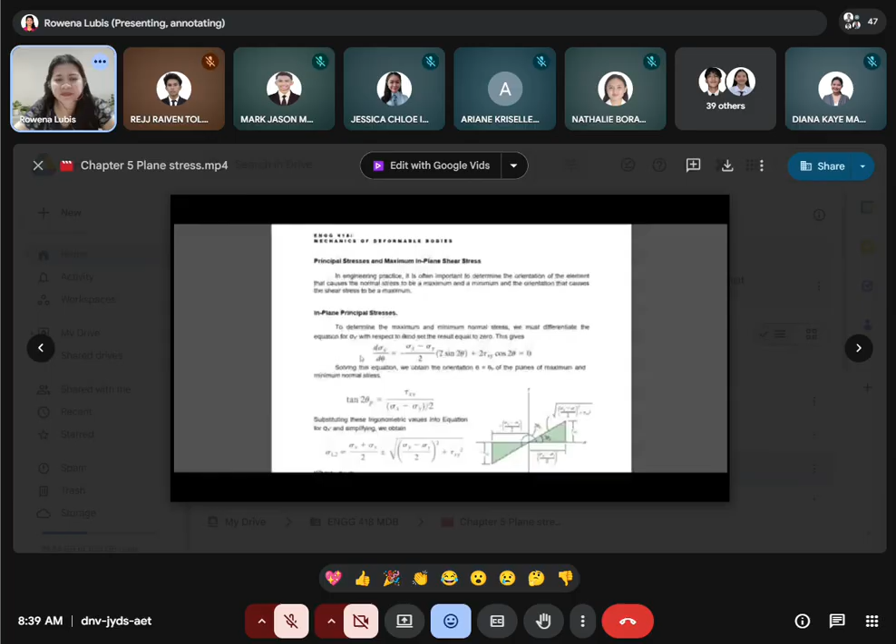And later we will be discussing the graphical method, which is the Mohr's circle, and we will be exactly adapting the procedure presented by Hibbeler. So are you seeing now the presentation? Okay, please react if you are hearing the audio.

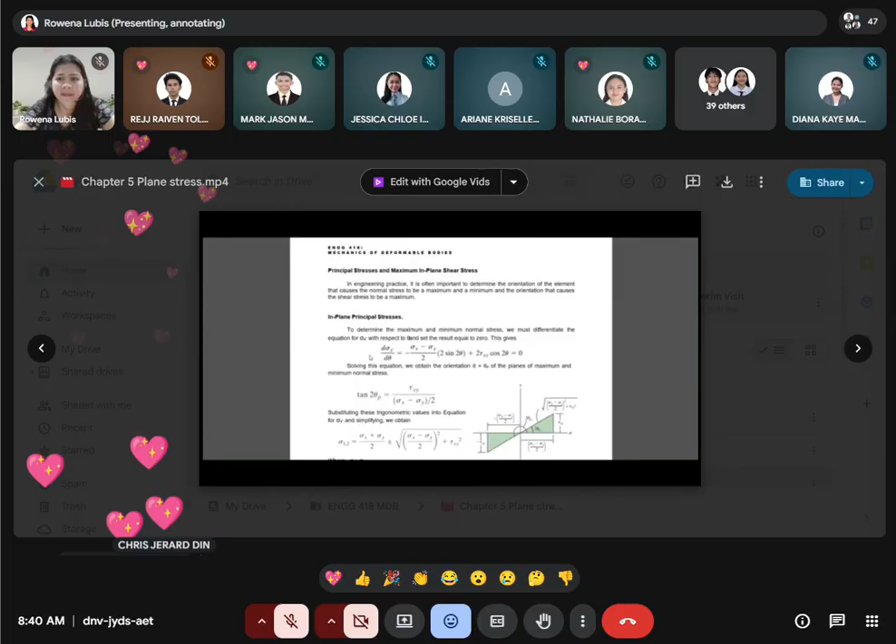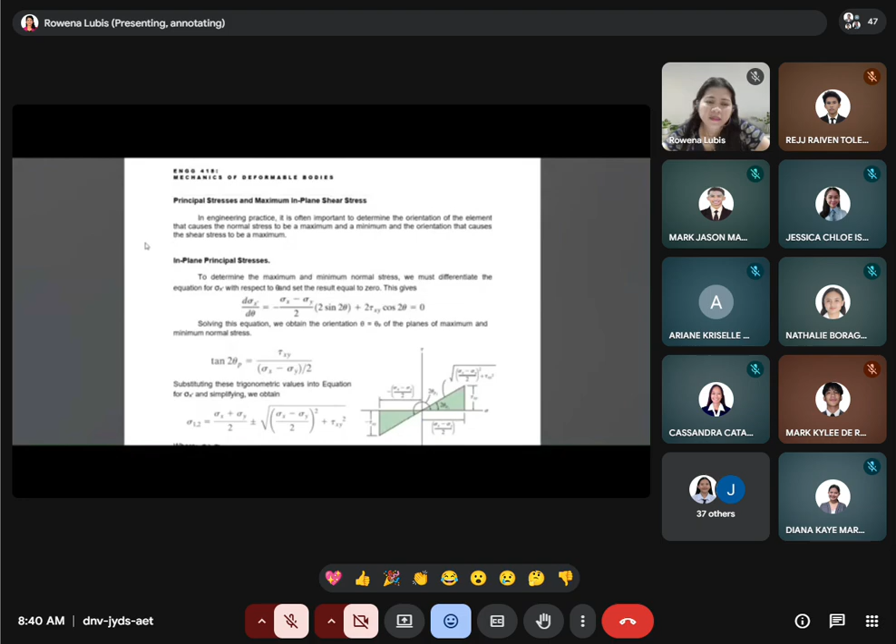So here as it states, in engineering practice, we often need to determine where the maximum normal stress occurs, where the minimum stress occurs, and where the shear stress becomes maximum. So why is this important? Primarily because the failure of materials usually happens at these critical stress conditions.

And what is the concept of principal stress? Let's start with the principal stresses. Principal stresses, from the word principal, it relates to the maximum and the minimum. Maximum and minimum normal stresses acting on a material at a specific orientation where the shear stress is zero.

Take note of this one, where the shear stress is zero. That means at principal planes, no shear stress. Only normal stresses exist. So you should always remember that.

And aside from the principal stresses, aside from determining the maximum and minimum normal stresses, another thing that we have to find is the orientation, the angle theta p. So to find where these principal stresses occur, we take the derivative of the stress equation and set it equal to zero. So we have here the equation.

And then just remember this derived equation for determining the value or the angle theta p, which is the orientation of the principal planes. So that equation will help us find the angle theta p. Again, that is the orientation of the principal planes.

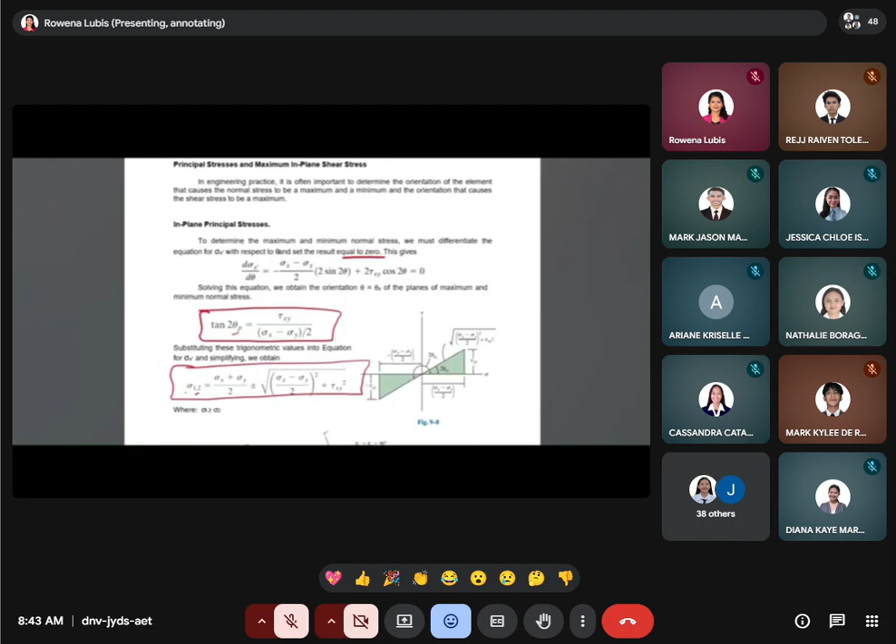So the best thing that you can do, determine all the givens and plug in the values in our derived or set equation. So yun lang po ang inyong gagawin. But of course, you should understand what is given in the illustration and in the problem.

So take a look at this illustration. So the element, this element, rotates to a certain angle theta, angle theta P. At that orientation, the shear stress becomes zero. Again, if the shear stress becomes zero, this one po,

nandito siya, may angle theta P1. So the material, no shear stress. Ano lang po ang meron? Normal stresses. At ang normal stresses, kapag ang atin pong shear stress ay zero, that is the maximum and at the minimum value. So the material chooses a direction where it experiences pure tension or compression only.

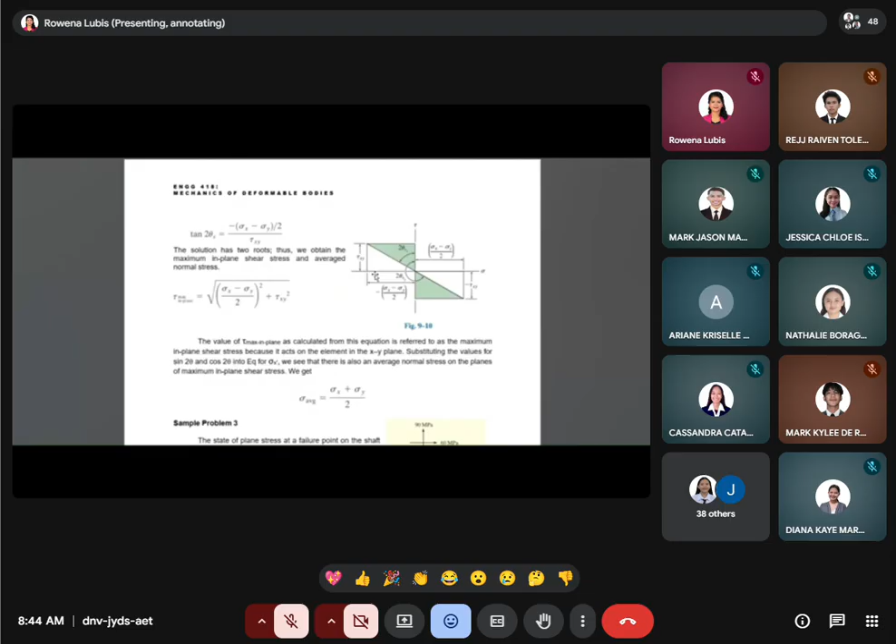Now let's move on with the in-plane shear stress. So this happens at a different orientation. Kanina po, nandun tayo sa maximum and minimum, yung normal stresses where shear stress is zero.

Ngayon, what is the maximum shear stress naman? Kailan naman yun nangyayari? So this happens at a different orientation, not the same as the principal plane. And you should remember, the maximum shear stress occurs at 45 degrees from the principal plane. Take note of that. It happens, the maximum shear stress occurs at 45 degrees from the principal plane.

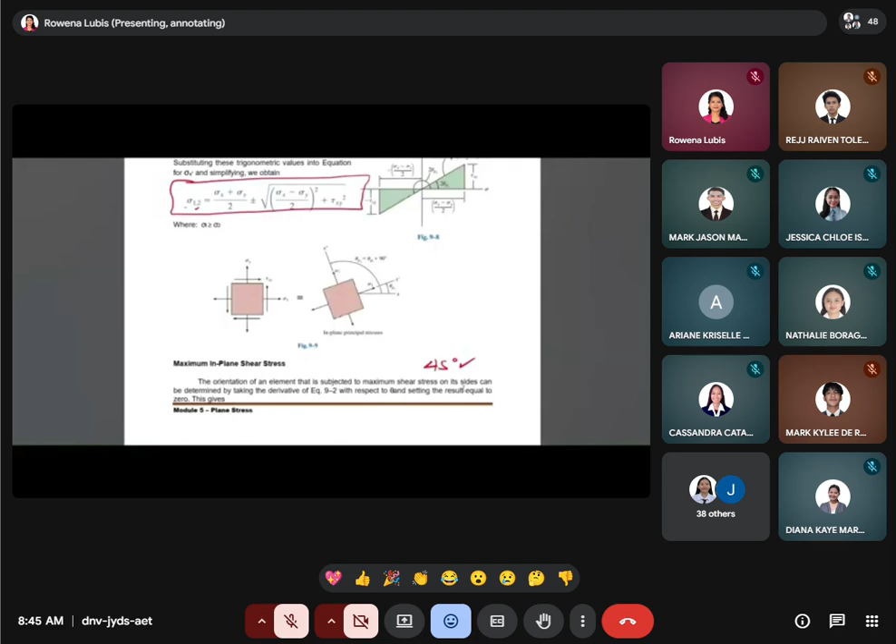For the maximum in-plane shear stress, so you just have to remember this equation.

Medyo madami-daming equation po dito sa ating plane stress. But as I mentioned, you could use a method. It's up to you. If you are comfortable using the equation, you just get the value and plug in with the equation, or you could just use the graphical method. Later, we will discuss the Mohr circle.

So again, this is the formula for the maximum in-plane shear stress. We have tau max is equals to the square root of the quantity sigma x minus sigma y over 2, squared, plus the tau xy squared. Okay, so that is the formula.

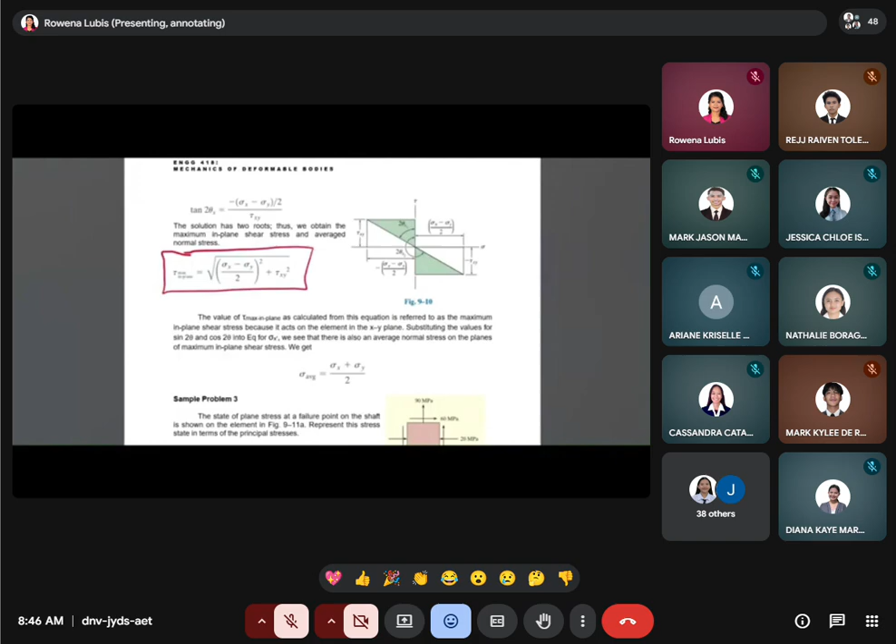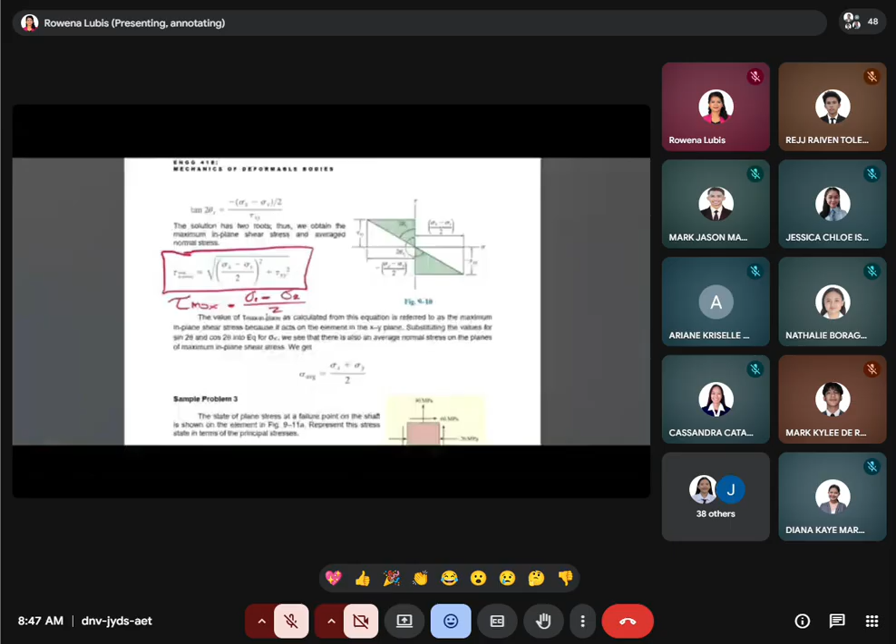Pwede rin po, or simply, itong ating sigma 1, kapag na-determine ninyo, ang shear max po natin, meron din po tayong pwedeng gamitin. Just remember, kung alam na po ninyo ang value ng sigma 1, the maximum, minus the minimum over 2, you could use this value. Kasi sa graph po, makikita ninyo kapag nagawa kayo ng graphical method, yung dalawang magkatapat, this is the horizontal plane, dun sa diameter niya, magkatapat po siya, naandun ang sigma 1, naandun ang sigma 2, divided by 2. So that will give us the maximum shear also.

Tatandaan nyo lang po, ang key relationship nila kapag principal stress and shear stresses are related. Kapag principal plane ang ating pinag-uusapan, ang shear stress po natin zero. Kumbaga pag umanggulo siya, naandito siya pantay. Itong vertical now is the tau, or the shear. So flat lang yung line niya dito. Zero ang tau. So naandito po sa diameter na ito ang ating principal plane. Maximum shear plane.

So tatandaan po, for the maximum, guys listen, yung shear max dyan, this max, actually this is not shear max. Kung mapapansin nyo, alin po yung ating pinag-divide dyan? Sigma 1 plus sigma 2. So this part po is not shear max. This is still normal, sigma po ito. And what is the sigma? This is the average, the average sigma or the average normal stress. Naintindihan po? Please react if you understood that this tau max is not correct.

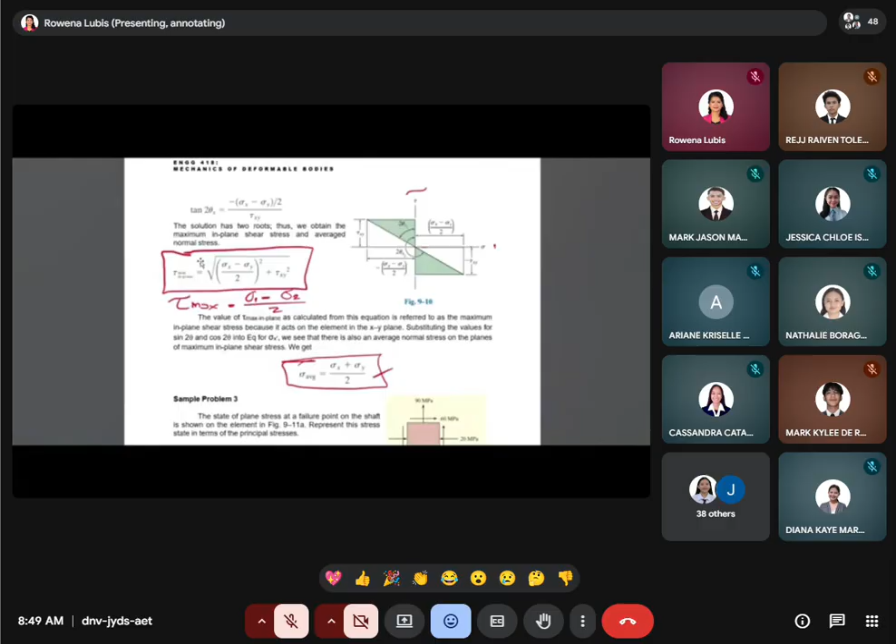Okay, so let's have a simple problem regarding this one, the substitution of values with our existing or given equation. I drew a simple example para magamit natin yung ating stress transformation using equation to find the values of those.

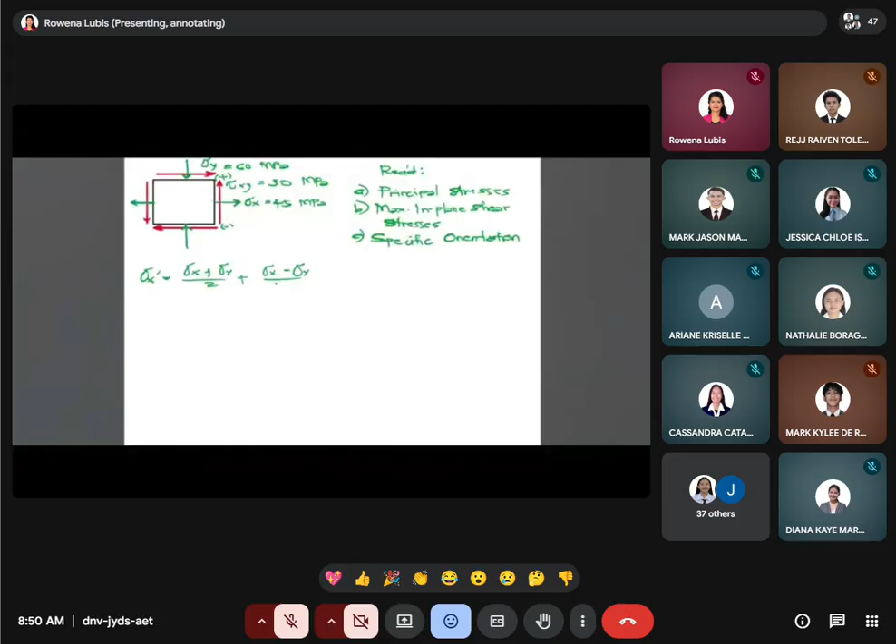So if you could still recall the first part of our discussion, finding the value of sigma x prime, this is equal to sigma x plus sigma y over 2, plus sigma x minus sigma y over 2, cosine 2 theta, plus tau xy sine 2 theta. And finding the value of sigma y prime, this is equals to sigma x plus sigma y over 2, then mapapalitan yung kanyang sign, minus sigma x minus sigma y over 2, cosine 2 theta, and the plus will be negative minus tau xy sine 2 theta.

And finding the value naman po of tau xy prime, this is equals to the negative of sigma x minus sigma y over 2, sine 2 theta, plus tau xy cosine 2 theta. So kapag sa problem ang pinapahanap ay itong mga ito, we could just use this stress transformation equation, and plug in all those given values.

And then another equation that we have a while ago is finding the direction of our in-plane principal stresses. So that adds to our set of equations. We have tan 2 theta p is equals to tau xy over sigma x minus sigma y, divided by 2.

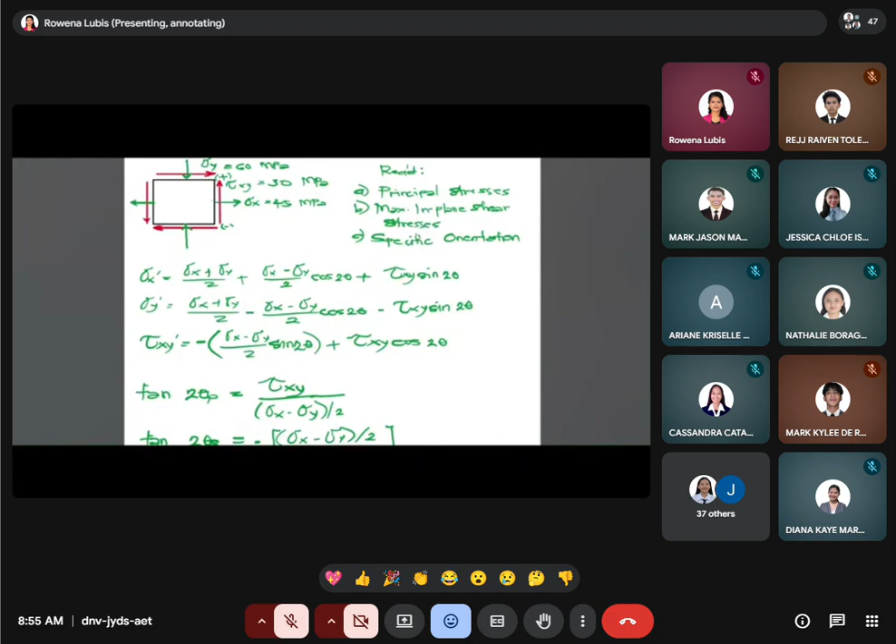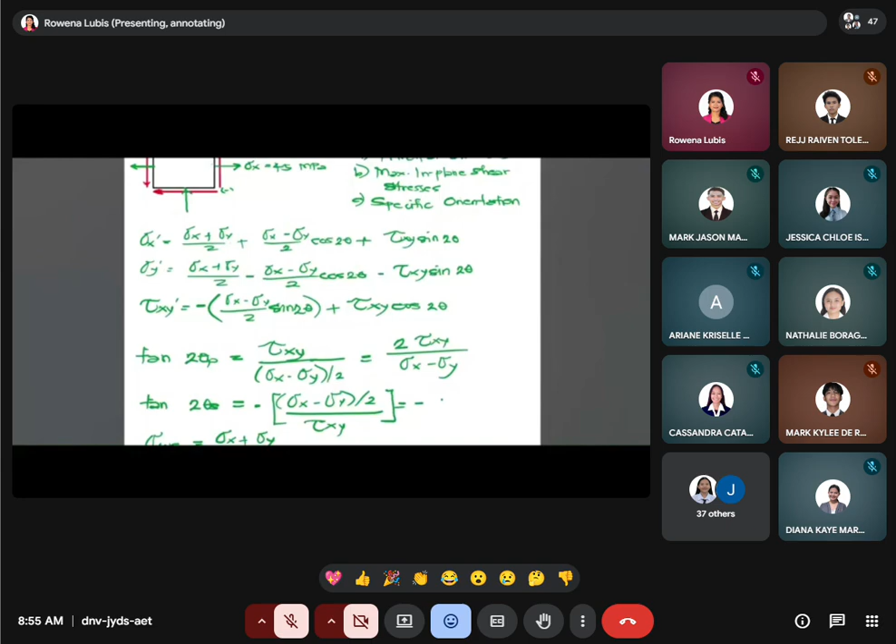Actually, we could still rewrite this equation. So this tan 2 theta p is equal to, if we raise the denominator, it could be 2 multiplied by tau xy over sigma x minus sigma y. It will give us the same value, isn't it? And for this one, this is equal to the negative of sigma x minus sigma y over 2 tau xy, right?

And there's another key relationship, a very important relationship between the angles. So the plane of this maximum shear stress is actually 45 degrees away from the principal plane. What does it mean? If you find the value of theta p, if you already have that value, to find the value of theta s, you just have to add 45 degrees. So you could consider this relationship. If you already find the value of the direction of the principal stresses, you can easily get the value of theta s, no need to solve again.

Okay, and also remember this average normal stress. Remember that on the plane where shear stress is maximum, this tau max, there's still a normal stress present. So even at maximum shear, the element is not purely shear. There is still a normal stress acting, and that is the average normal stress.

Right, okay, so let's solve this simple problem. So given the illustration, as I mentioned, given are our equations. This is our stress transformation equation. We could use it to find the value of the unknowns. But here, primarily, we will just be getting the requirements of principal stresses, maximum in-plane shear stress or tau max, and their orientation, the specific orientation.

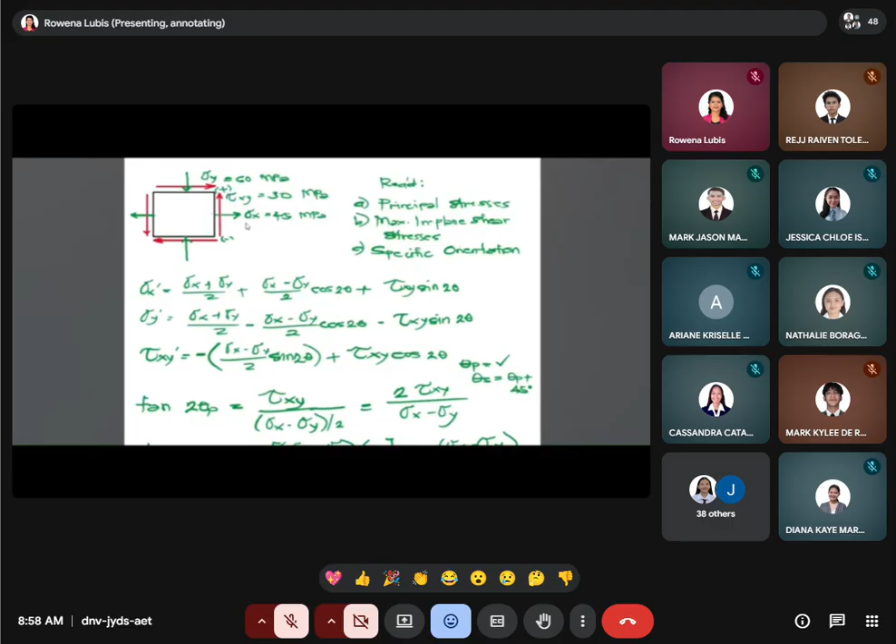Again, sigma y is negative, look at the illustration. Our sigma y is in compression, so that is negative. Our shear is counterclockwise, and that is in the direction of positive. Sigma x is positive because that is in tension. So those are the concepts that you should remember.

Now, finding the value of our maximum or the principal stresses, sigma 1 and sigma 2. So we have sigma 1, sigma 2. So that we're not confused, sigma 1 is 45 plus negative 60, because that is plus, actually this is plus, what else? Plus negative 60, over 2. And then we have plus minus.

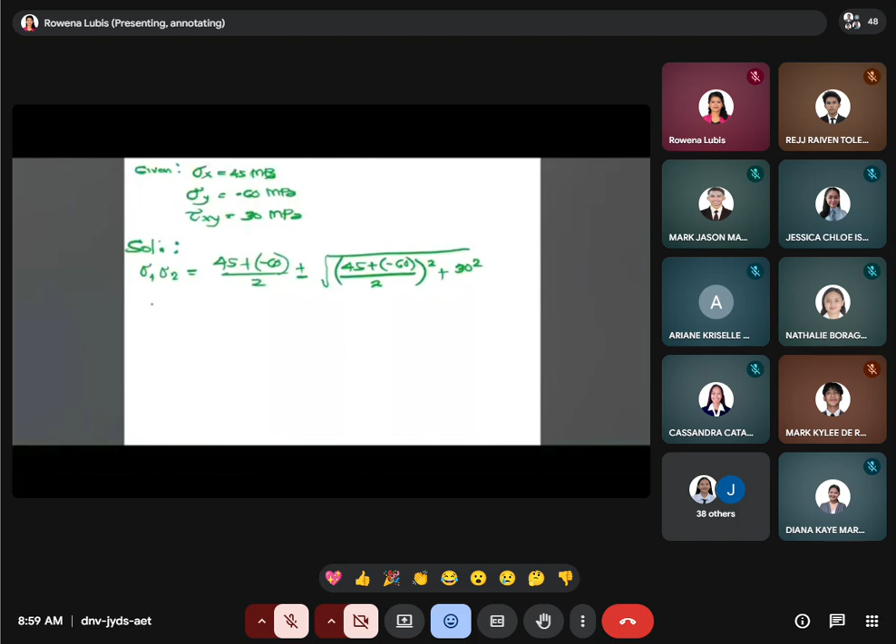The maximum and the minimum, square root of sigma x... sigma x is 45, and then plus negative 60. Negative 60 is our sigma y, over 2, then squared, plus the tau xy squared, and that is 30 squared. For sigma 1, computing this with our calculator, it will give us the value of what?

52.9669 megapascal, approximately equal to 53 megapascal.

And for our sigma 2, we have to make it negative. So we have negative 67.9669 megapascal, approximately equal to 68 megapascal. Alright, so this is the answer for letter A. We have sigma 1, sigma 2, so this is our answer.

And for letter B, we have to find the tau maximum from the given equation. That is the square root of sigma x minus sigma y over 2, squared, plus tau xy squared.

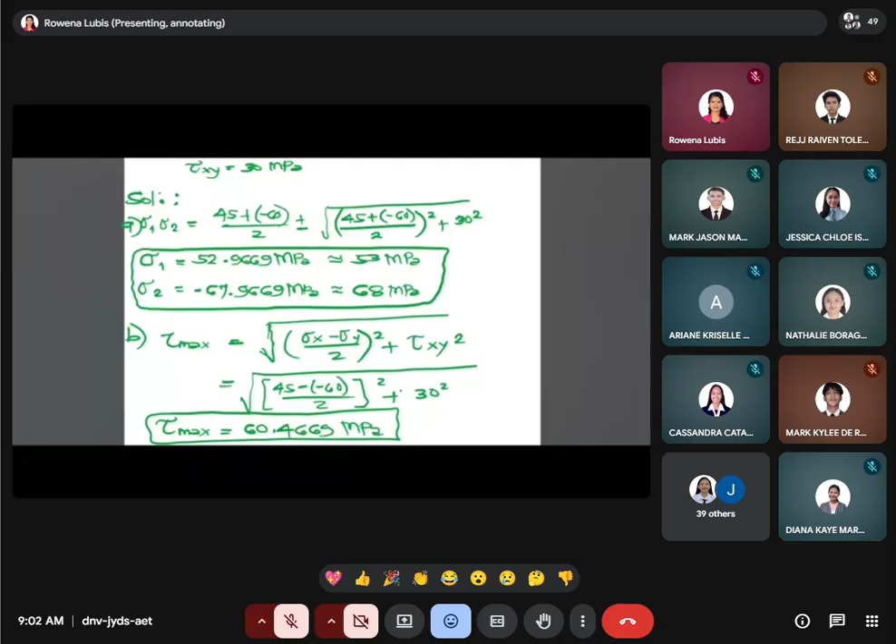Alright, and let's proceed with the direction. So for letter C, we have to find the specific orientation of our principal stress. So what is the formula? Tan 2theta p, this one, right?

So we have tan 2 theta p, the direction of our principal stress, is equal to tau xy over sigma x minus sigma y, divided by 2. So our tau xy is 30 megapascal, divided by 45 minus our sigma y which is negative 60, and then divided by 2, right?

So computing it from our calculator, our theta p will give us the value of 14.87 degrees. Okay, so when is that?

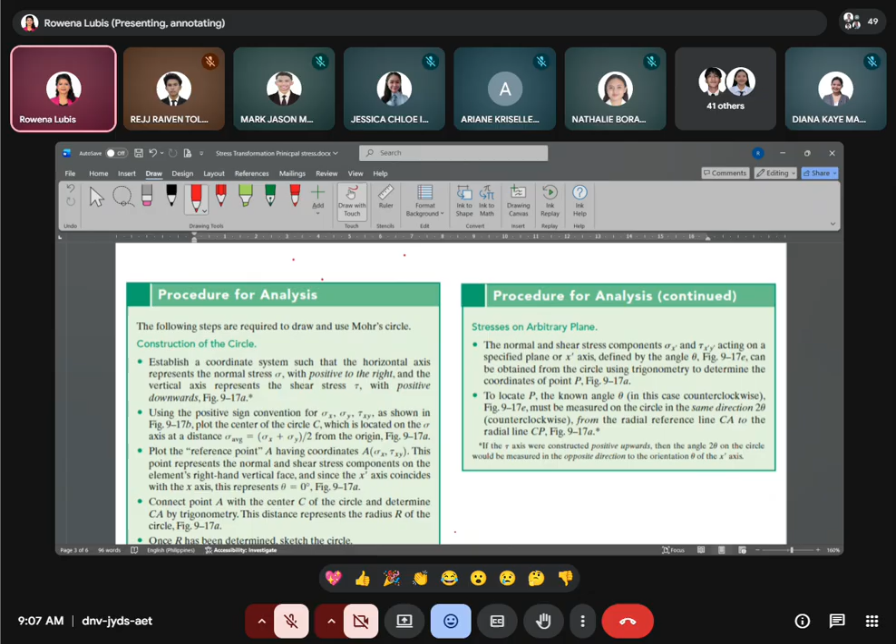Okay, because when I do the solution dealing with the Mohr circle, I also use the Mohr circle instead of numerous equations. I'm also not very good at memorizing many equations, but I prefer the Mohr circle. In the Mohr circle, it doesn't zoom out. Why? Hmm, I'm not sure, it won't zoom out.

So if you notice, in the construction of the circle, this is taken from the book of Hibbeler. What's placed there, the coordinates - aren't our coordinates positive? Later, when we do a sample problem, we will discuss this. This is our sigma and this is our tau - not xy, this is now sigma and tau.

Below is the positive. That is the procedure for analysis given by Hibbeler - represent shear stress, the tau, as positive downward. So what's a bit confusing to me? But actually, the answer is also correct. I just don't want to confuse myself, so I still followed how I learned it before. Because in our module, let me present the module to show why I'm a bit confused.

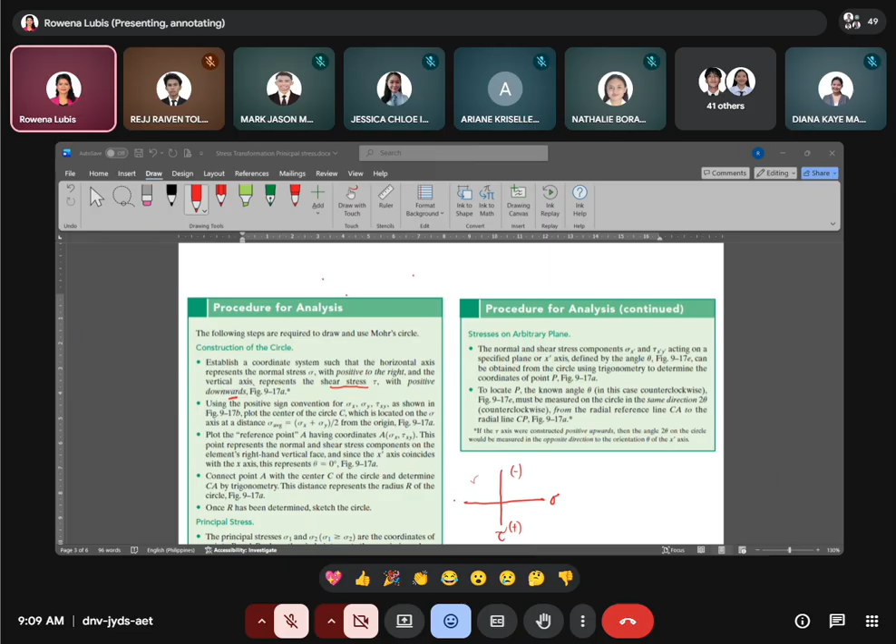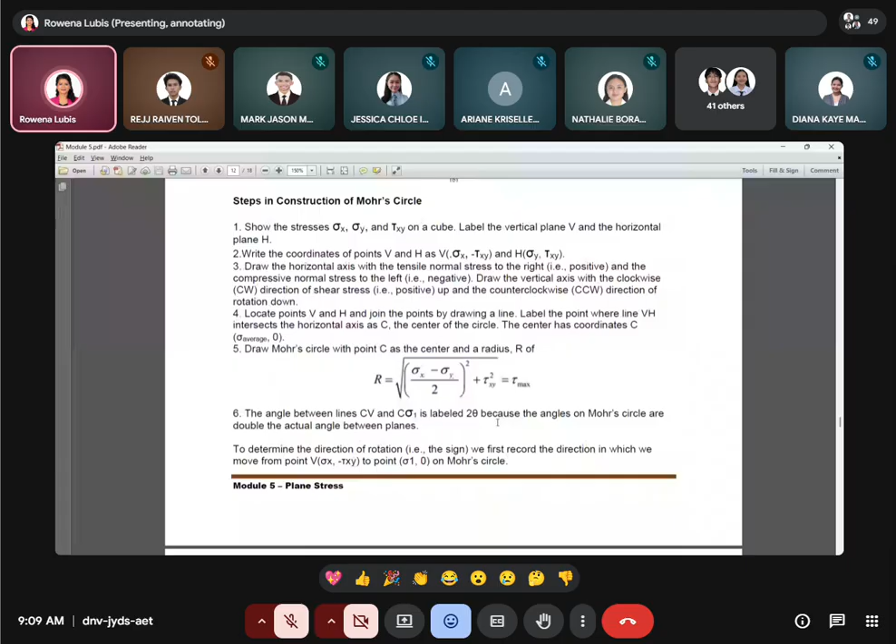Ito po kasi yung ating module. Kapag nag-graph sa Mohr circle, mapapansin niyo ang coordinates na nakuha natin sa vertical at horizontal, nasaan na ba yung value ng coordinates?

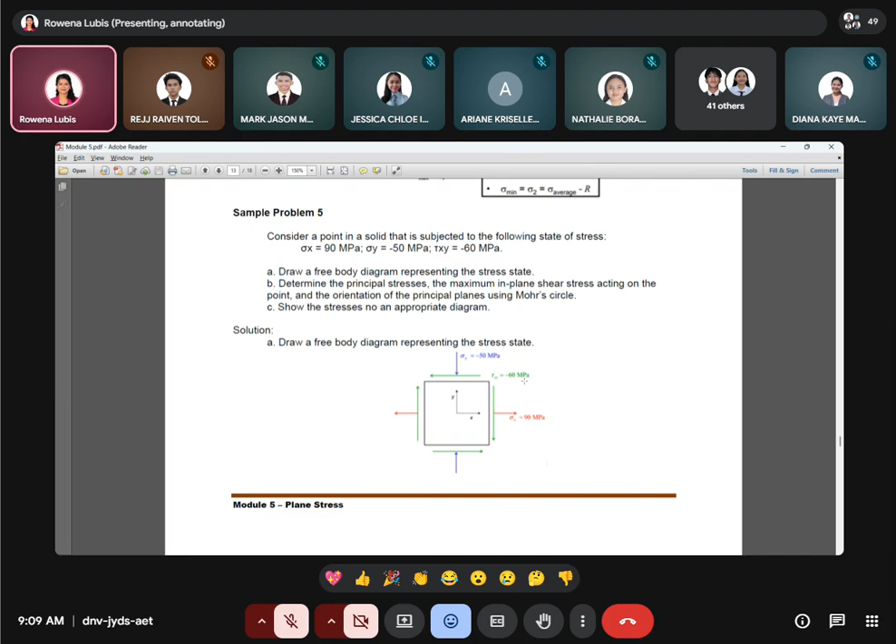So we have here this example. Ang interpretation ko kasi pag ganito, pababa compression but you state that this is negative. Kung negative siya pababa, therefore this should be in positive tension. Same with this negative 60. If you have downward negative, so to make it positive, ibig sabihin downward siya, negative siya doon, so dapat gawin mo siyang clockwise.

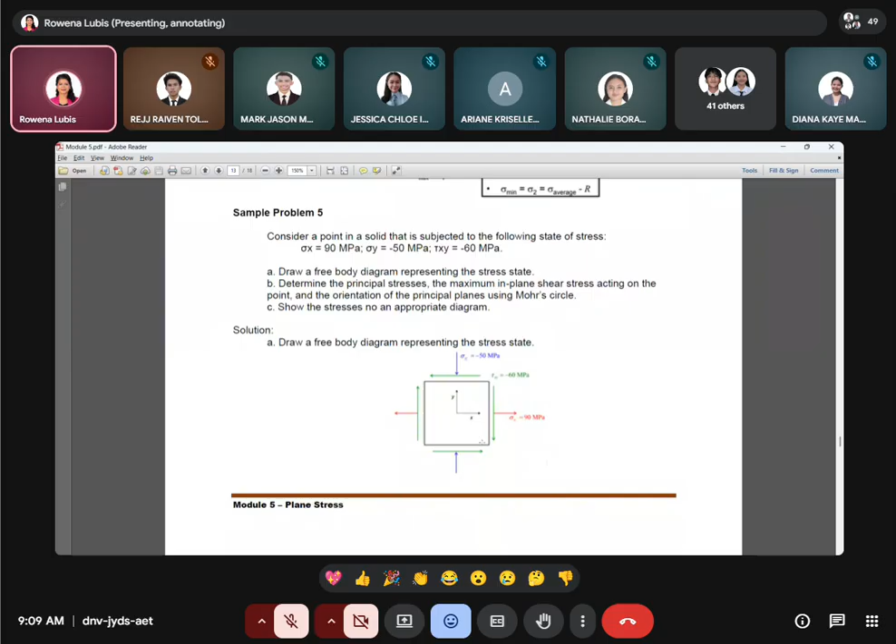But actually, as this shows, it is a personal example. Hindi lang po ako maka-relate dito, but all the answers dito tama po, because I tried to solve it on my own using the procedure for analysis of Hibbeler, and all the values are correct - the sigma 1, the theta, the radius, they are all correct.

Following the rules of Hibbeler, so I cannot judge the solution na ang ginamit niyang positive is yung nasa taas, kasi based on Hibbeler, the tau will be at negative. Downward, not negative pala. The tau positive is at downward position. Naintindihan po yon?

So I do the same example, following the procedure of Hibbeler, and it resulted the same value. It's up to you what you prefer. Ang tau po ay positive pababa, from the reference book natin ni Hibbeler. Dito kasi ang tau niya is ang positive kasi dito, mali pala yung aking hinihila pababa.

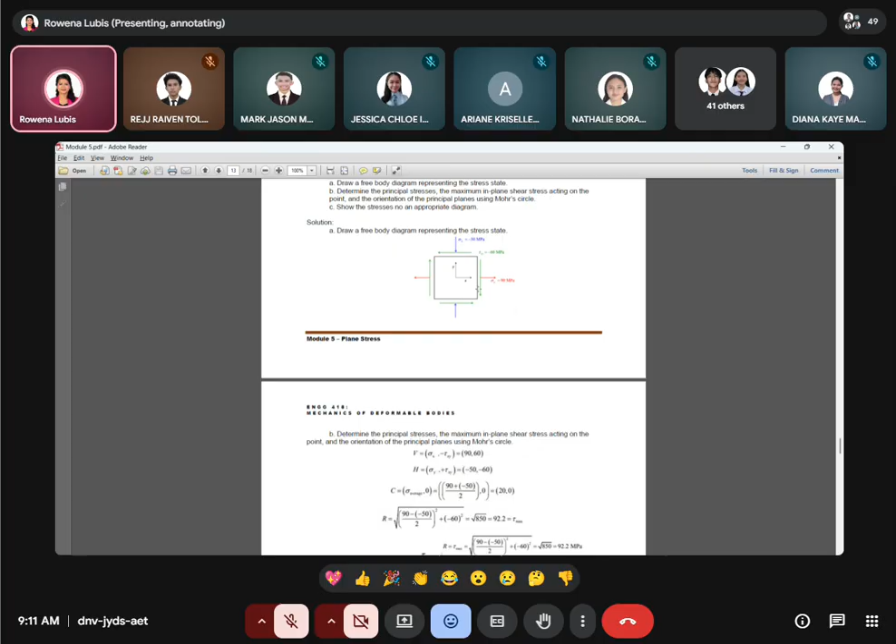So ano ang naging coordinates niya? Ang sabi niya coordinates ay ang tau niya is 60. Negative po kasi yun, negative pababa. Negative doon, ibig sabihin magpa-positive siya, that's why meron siyang positive 60. So positive 60, dapat yung pinaka-tau niya, okay yung positive ka dito sa sigma, na dito sa line na ito, positive ka. Pero yung iyong tau should be at this point.

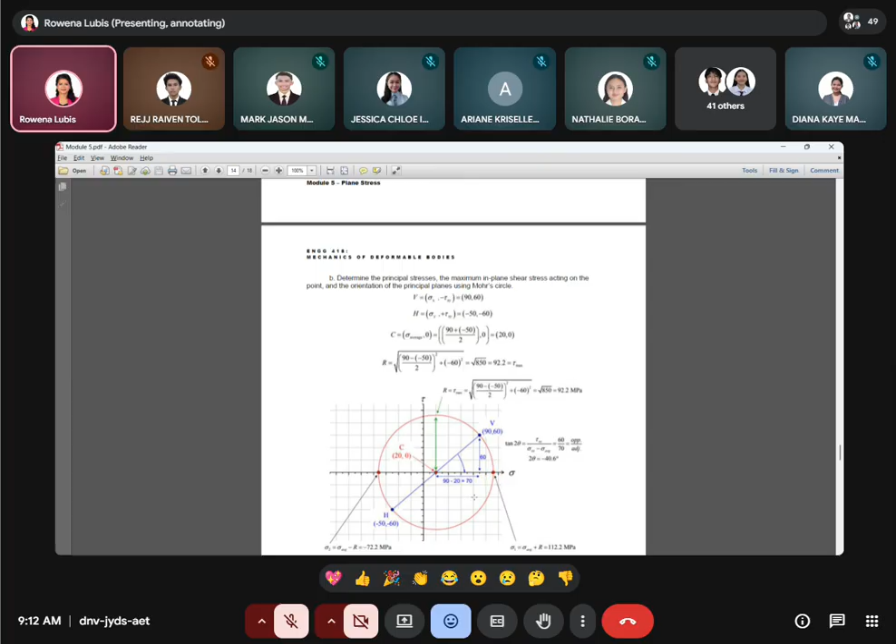This point ka dito, and then look at this one, negative 50. So negative mo si sigma, dito talaga siya, 50. Pero ang negative tau mo dapat somewhere here. Kaya kumbaga nabaligtad lang yung pinaka diameter na ipinapakita. But overall, since it's just the same circle, definitely we could have the same value.

So that's why it's up to you, but I am suggesting and really recommending that you follow what is being stated or represented by the book, by our reference book of Hibbeler, the Mechanics of Materials, na yung tau should be positive downward. Naiintindihan po yon?

So let me present the solution. I will not present the details ng procedure for analysis, so susundan niyo lang po siya, paano siya mag-graph. I solved this on my own, following what I knew from the very start. I learned the Mohr circle from the book of Hibbeler. Nasaan na ba siya?

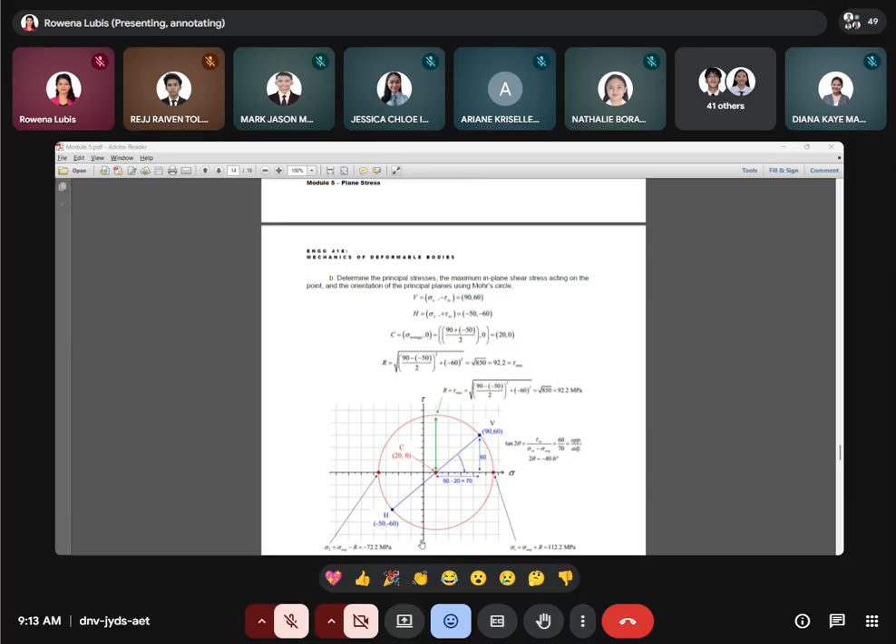Let me use this sample problem, given in the illustration. So we have here a plane. We have the sigma x 90 megapascal, it's in tension. The sigma y is 50 megapascal, that is in compression. And our tau xy is 60 megapascal. Okay, so let's do and find the values.

Ano po ang mga values na ating kukunin? That's why I use this problem. We will not just be focusing on one, two, or three requirements. We will be using the graphical method, this Mohr circle, to find the value of all the values presented by the equation. So we could find the value of the center, which will give us the average stress. We will find the maximum stress. Through graphical method, sige, isa-isahin po natin.

Through graphical method, we can find the value of the average. We can find the value of the maximum shear stress. We can also find the value ng ating principal stresses, yung atin pong sigma 1, sigma 2. Ano pa? We could have the direction. So we can find the value, yung direction po nitong principal stresses na ito.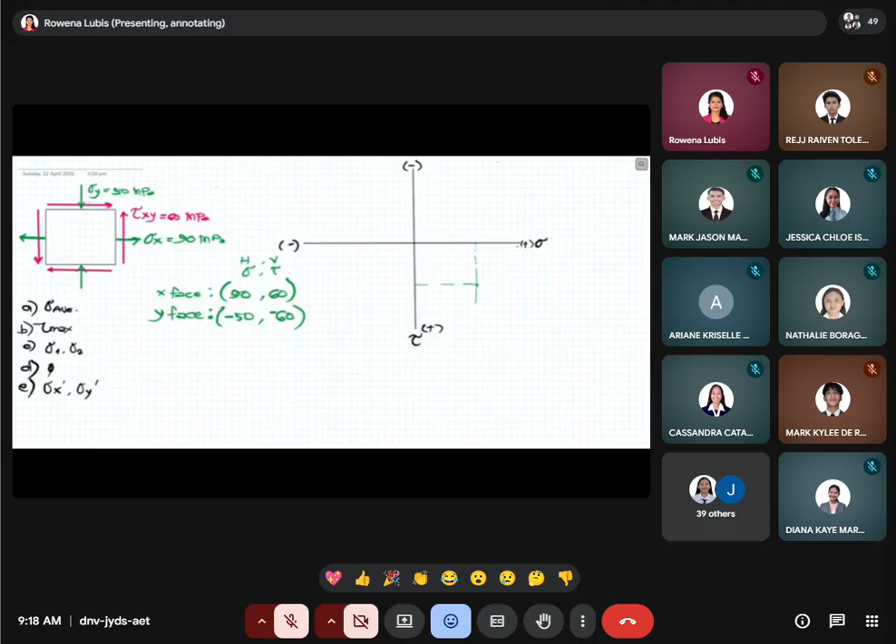Okay, then plot it in our sigma tau coordinates. We have positive 90 and positive 60. So positive, dito ang kay sigma. 1, 2, 3, 4, 5, 6, 7, 8, 9. So naandito po 1 to 9. And then positive ulit si tau, so dito nyo po siya i-project. Positive 60 naman kay tau, 1, 2, 3, 4, 5, 6. Project na lang po natin siya. So this is our first dot, or first location.

So lagyan niyo lang po siya saan siya galing, galing siya kay X face mo. It's up to you kung gusto niyo siyang ilagay, and that is the coordinates po para lang hindi po tayo maligaw - that is 90 and 60. Okay, and another coordinates mo galing kay Y face.

Okay, kung mapapansin nyo, si tau, positive and negative, ganon din si sigma, kasi magkabilaan po sila. So ang ating pong sigma dito ay negative. Dito naman po tayo, negative 50, 1, 2, 3, 4, 5. Somewhere here. And negative din ang ating tau, so dito tayo sa quadrant na ito. Project lang natin siya pa ganyan.

Tapos, negative 60. 1, 2, 3, 4, 5, 6. So this is negative 60. Ah, ito yung aking broken line. Hindi siya line. Yan, yan, yan, yan, pwede na yan. 1, 2, 3, 4, 5, 6. Negative 60 po kasi ang ating tau dito. And that is our Y face. Coming from our Y face, ang coordinates po natin dito, negative 50, negative 60.

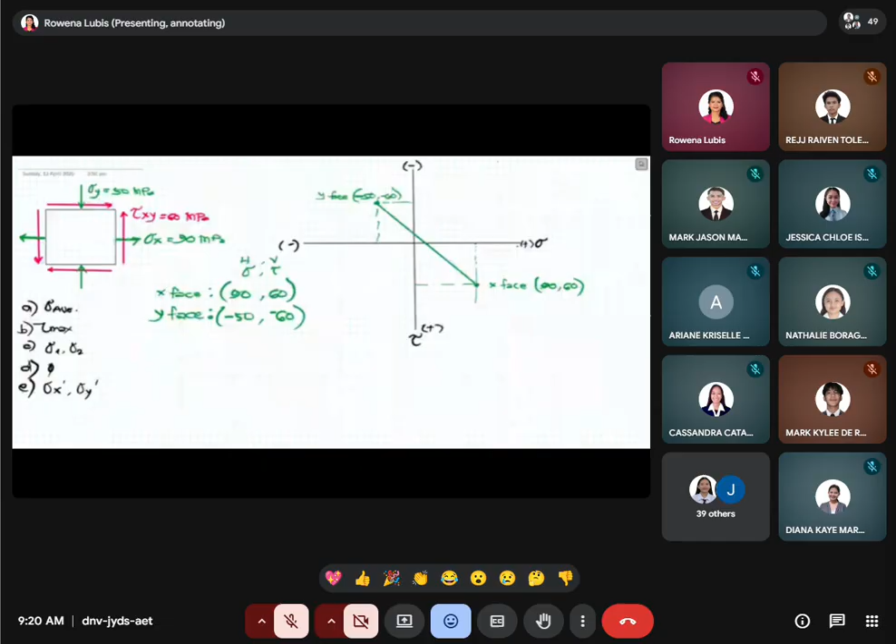Okay, so ano pong meron? Pag na-plot natin, pagko-connecte natin sila, and that is the diameter of our circle. Kung may diameter tayo, gagawa natin siya ng bilog. So let's create the circle for that diameter. Now we have our circle na, the Mohr circle. So kailangan lang natin siyang lagyan ng mga values. Let's just locate where is the center of the circle. So this is the center.

You can locate, kahit di po siya perfect, yung aking circle, yung aking line. But if you are using the correct drafting tool - compass, ruler - you can plot it in a very accurate or precise manner. All right, but for the sake of discussion, let's continue. So this is the center of our circle. So how to determine the value of the center?

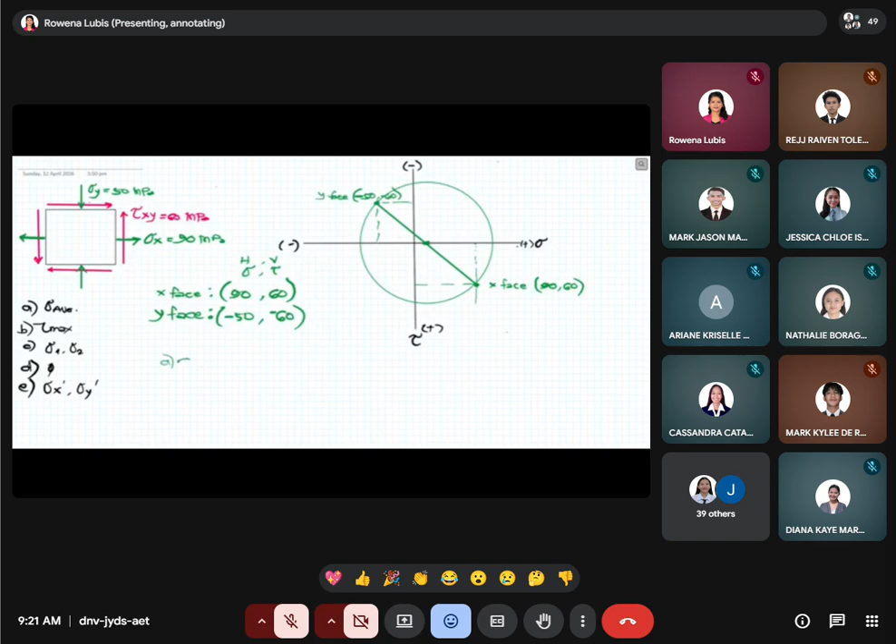One, sabi natin, ang center natin is the sigma average. Okay, so let's have - ano yung ating center? From our discussion, ang center ng ating circle ay equal to the average stress.

So paano po natin malalaman? Ang ating center, to determine - di po ba, we have at this side, this is 90, correct? And at this side, we have 50, okay? Therefore, finding the center is just the middle of this 90 and 50 divided by 2 lang po natin. So we have 90 plus 50 over 2, ang gitna po natin, we have 70. Okay, 70 - kung 90 po ito, ibig sabihin 90 minus 70, 20 po ito, kasi 70 ang gitna. Ito po, yan, this is 70.

Also, this is 70. So ang center po natin dito, ito pong center natin, ano po yan ngayon? Sabi natin, ang center natin ay sigma average and then 0. So definitely, ang center natin ay 20 megapascal, 0.

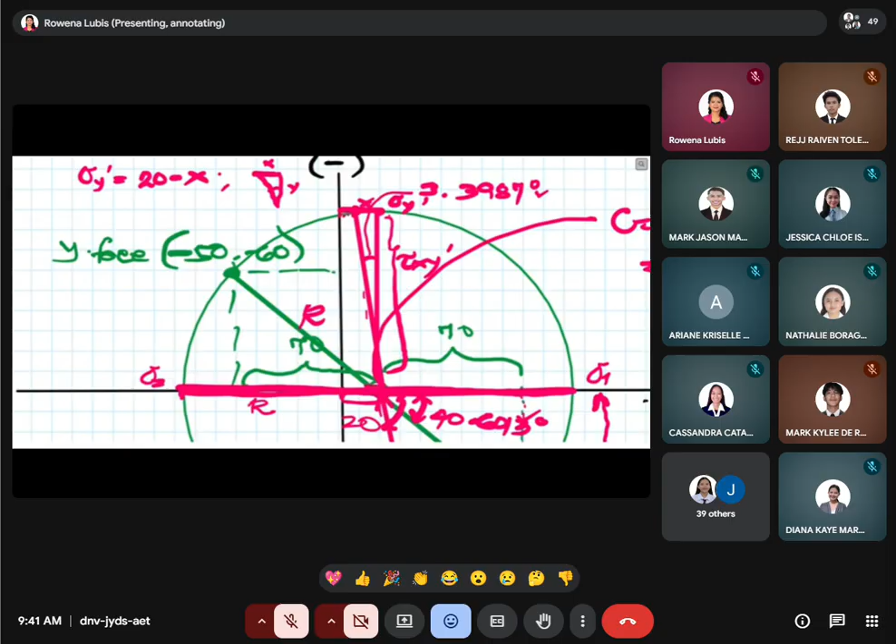May angle tayo dito na 3.3987, so hahanapin natin yung x. Itong y, itong height na ito, this entire height is already our tau xy prime. Yung makukuha nating value dito, pag tayo ay nag-triangle rule, gagamitin natin siya sa pagkuha ng sigma y prime, which is yung ating center, minus this x. Let's solve it sa baba.

Yung ating sigma x prime, okay. Punta muna tayo sa sigma y prime kasi siya yung nasa iikutan. Kung mapapansin niyo, ari kasi yung ating y face. Kapag siya ay nag-rotate clockwise, papunta siya doon, so pupunta doon ang sigma y prime. Kaya, yung x, it doesn't represent the x doon sa ating, the face of the sigma. Hindi yan, that is the face of y. So that is the sigma y.

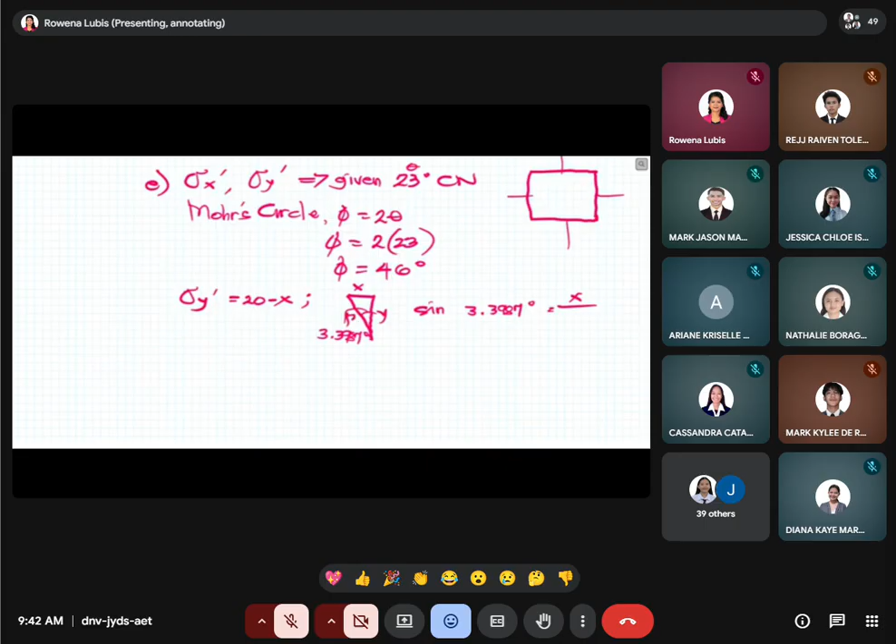Ang sigma y natin, sabi natin, it is equal doon sa center, 20 minus yung x. Saan natin i-evaluate ang x? Evaluate lang natin siya dito, doon sa triangle, this is we have here y, and the angle here na given, which is 3.3987 degrees. Evaluating this triangle, di ba this is opposite of the direction angle. So that is yung ating sine of 3.3987 degrees equal yon sa ating x, over what is this one? This is actually the radius, di ba? Mapapansin niyo, radius pa din iyon.

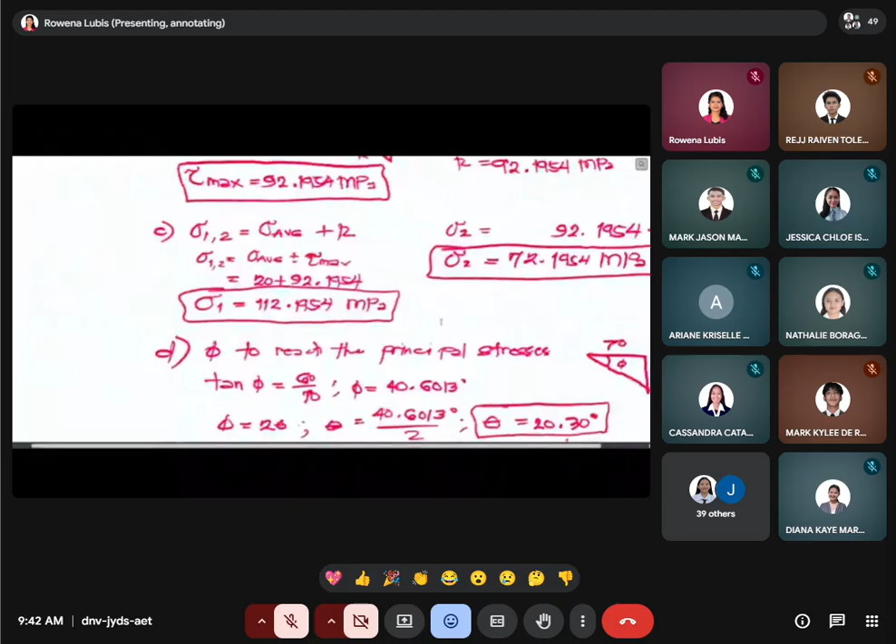Representing or substituting the value of our radius na nakuha na, 92.1954, ilalagay lang natin siya as the hypotenuse of our triangle. So this is 92.1954, and then we can solve for the value of x: 92.1954 multiplied to sine 3.3987, so it will give us the value of 5.4541. Pag pinag-minus natin siya, sigma y natin 20 minus 5.4541, ang ating sigma y prime, it will give us the value of around 14.5343 megapascal.

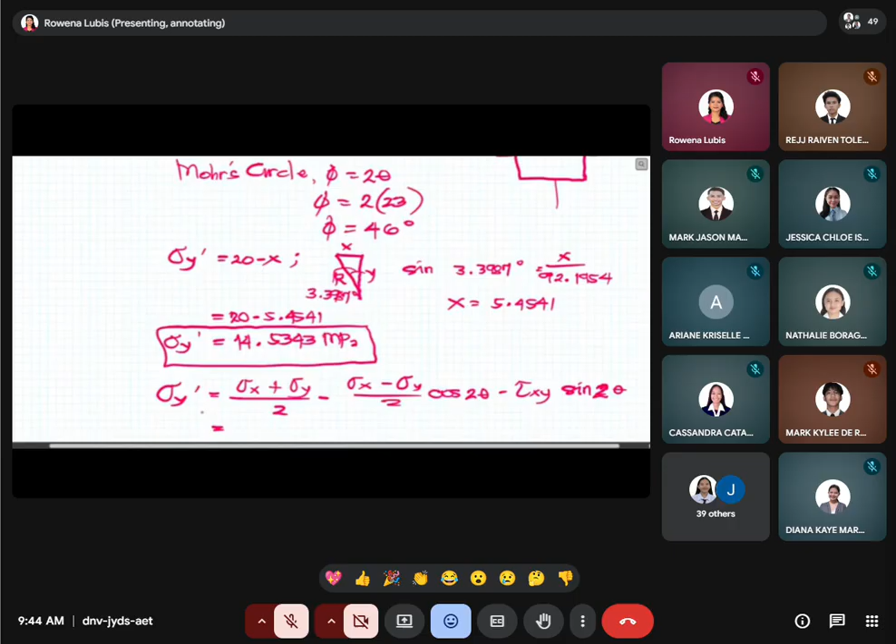So this is our sigma y. Kung gusto niyo po siyang i-check doon sa ating equation, di ba meron tayong formula for sigma y? Ano nga yung formula natin? This is sigma x plus sigma y over 2, negative, minus sigma x minus sigma y over 2 cosine 2 theta minus tau xy sine 2 theta. Ano yung mga value? You can check or validate naman through the equation.

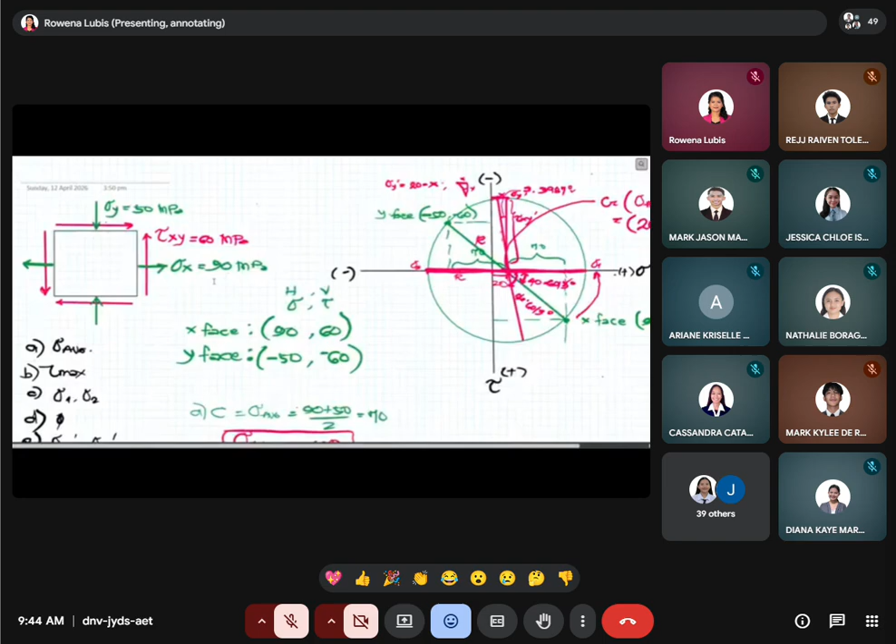Alin ang given natin kanina? We have for the ating sigma x ay 90, ang ating sigma y ay negative 50. Substitute lang natin: sigma x natin ay 90 plus negative 50 over 2 minus sigma x natin 90 minus negative 50 over 2 cosine. And what is cosine natin? That is 2 times, remember nasa equation na tayo, so ang ating gagamitin theta diyan is yung 23. We have 2 times 23, 23 ay sabi clockwise, so that will be negative, 23 times 2, that is negative 46 degrees.

Minus ang ating tau xy given in the problem is 60 megapascal. Substitute lang natin: 60, and then again that is 2 theta to negative, that is negative 46 degrees. Sigma y, please compute it in your calculator. Sigma y prime is equal to, it's just the same.

14.53 megapascal. So you can check it into the equation. But if you can do it graphically or interpret the Mohr circle, you can actually solve all the values through the Mohr circle.

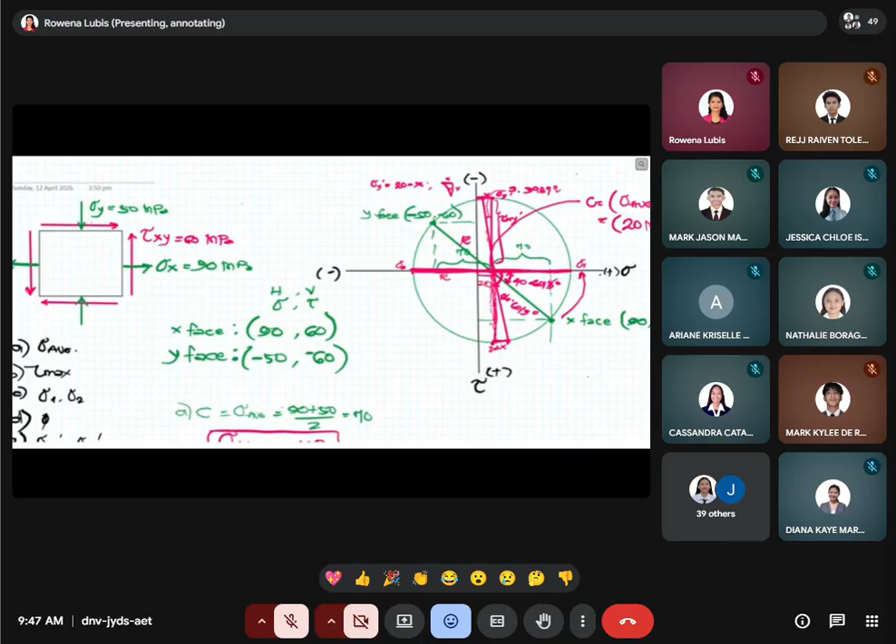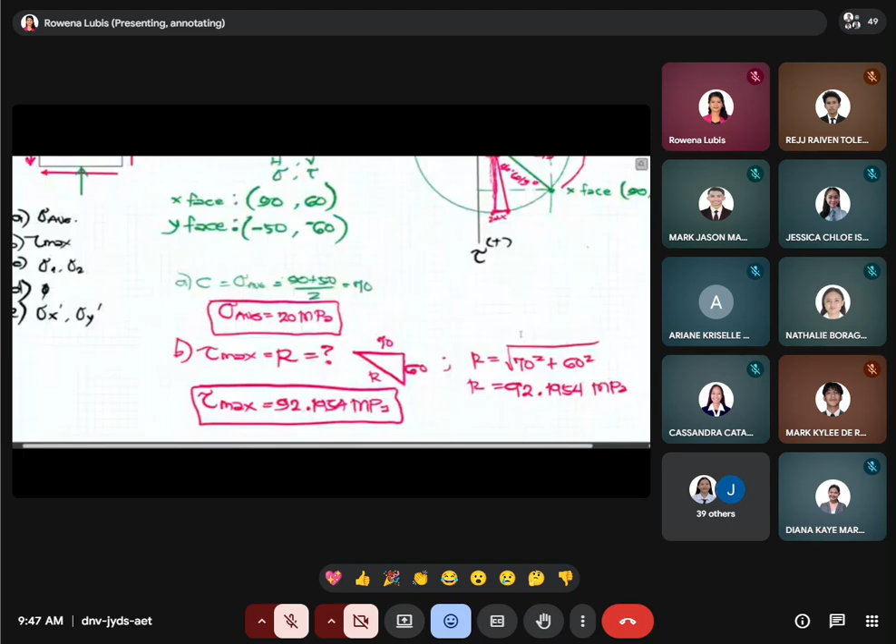So our sigma x prime is here at the bottom, because this is the x face, and when it rotates, it goes here. So we just have to evaluate. Our sigma x prime is just the center, 20,

plus the value of x we got earlier, which is 5.4541. Therefore, our sigma x prime is equal to 25.4541 megapascal. So this is the value of our sigma x prime.

Through the equation, the values we get should be close, if not exact, at least matching in the first or second decimal. You can check it against the actual stress transformation equation, as we did with sigma y. Let's check it now.

Sigma x prime is equal to the equation: sigma x, 90, plus sigma y, -50, over 2. And this is plus sigma x, 90, minus sigma y, -50, over 2, times cosine of -46 degrees,

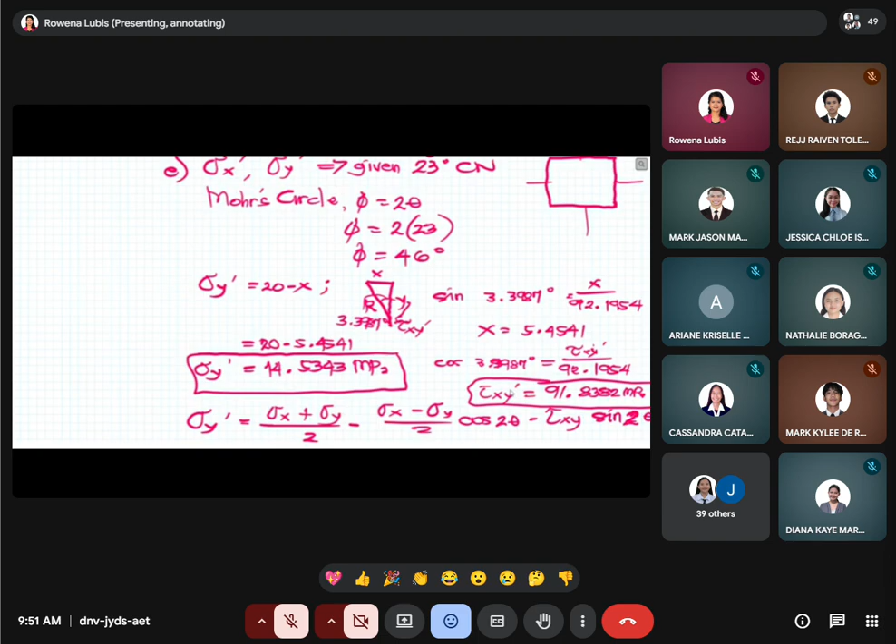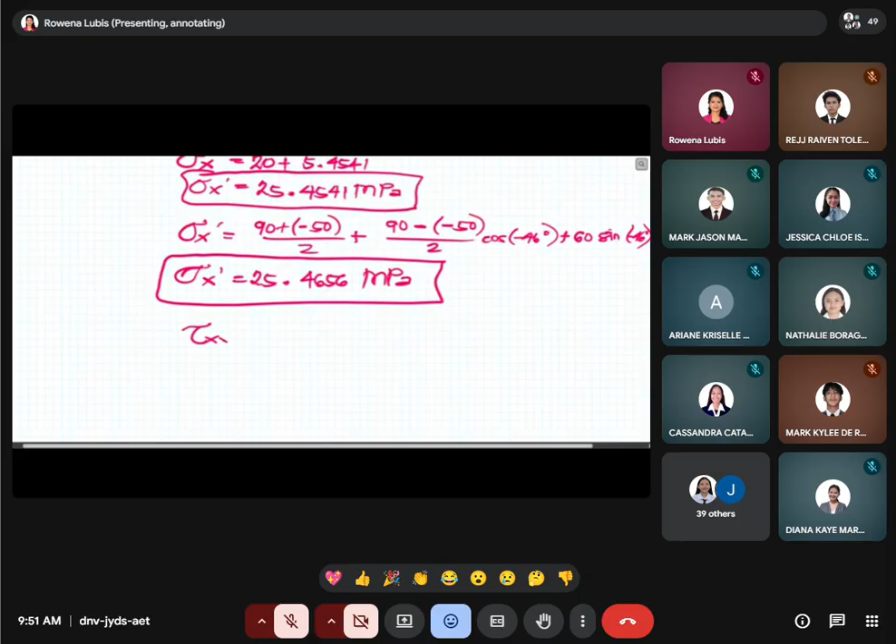And still, this tau xy prime, you can check it with our given equation. Let's check it. Using the equation formula, the value we should get should not be far off, but it's probably not the exact value, because we are using the graphical method.

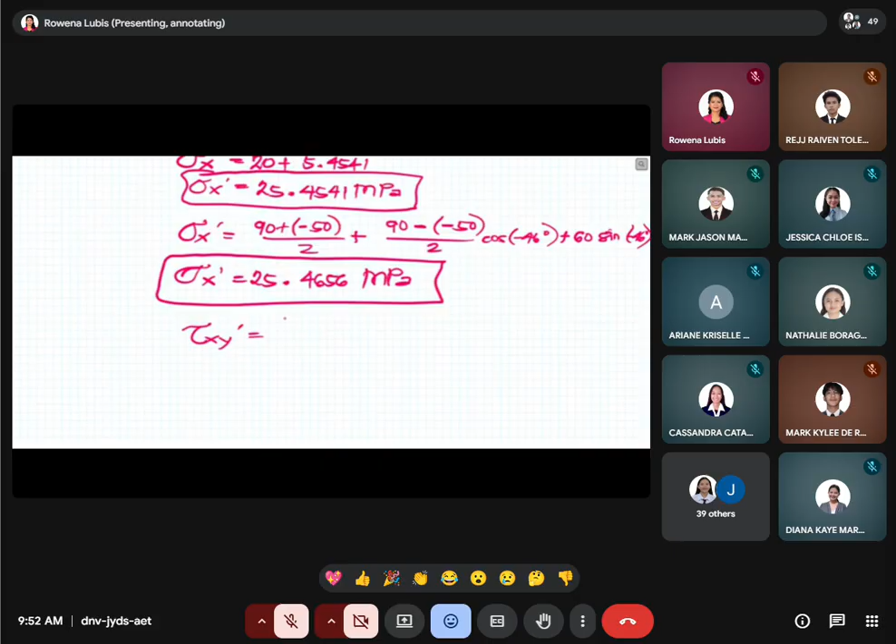So the plot, the points could be less precise compared to the value we get when we use the equation, because our grid lines are not perfectly even, but the whole number should be the same. So what is our formula for tau xy prime?

That is negative sigma x minus sigma y over 2, sine 2 theta, plus tau xy cosine 2 theta. So, plug in the given values.

So our tau xy prime, what value does it give? The value gives 92.0333, to 4 decimal places, in megapascal. So this is the value of our tau xy prime.

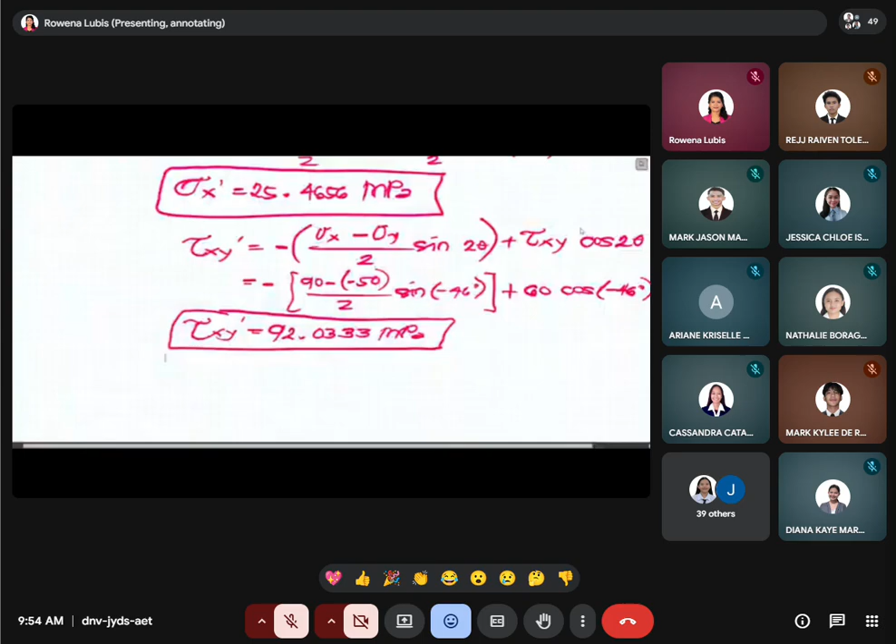So either of the two methods, you can choose whichever method you are comfortable with, whichever you think is easier for you, in our plane stress related problems. So it's up to you.